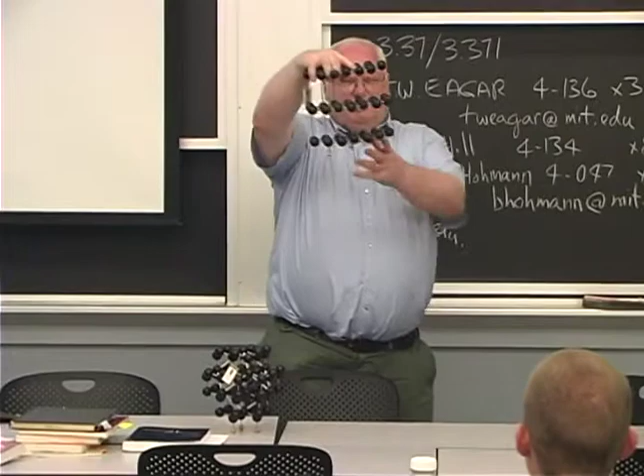This is called graphite, and it has a kind of layered structure. This is called diamond cubic, and it actually has a cubic structure, shown in this little white cell. If you know anything about crystal structures, it's got a face-centered lattice, meaning points at each corner and an atom right in the center of each face, plus a few other atoms hidden inside. This is the crystal structure of graphite, and this is the crystal structure of diamond.

Even though it's the same atom, because of different bonding, graphite has what we call sp2 bonding. The atom in the center has 3 atoms around it, with one up above and below between layers. But the strength of that bond is nowhere as strong as the bonds in the plane, so you have sheets of atoms.

When we get to the welding part, I'll tell you about the history of the early Mercury flights and how they ran into problems when they first put their lubricants up in space. In the first Mercury flights, the graphite lubricants turned to abrasives, and so some of the knobs and switches didn't work very well.

Diamond cubic, on the other hand, has what we call sp3 hybridization, and each atom is surrounded by 4 others in a tetrahedron—like a 3-sided pyramid with a triangular base. That difference in bonding has tremendous effects on the properties: the bonding in graphite is sp2, diamond is sp3, and the crystal structures are different because they reflect the geometry of the bonding.

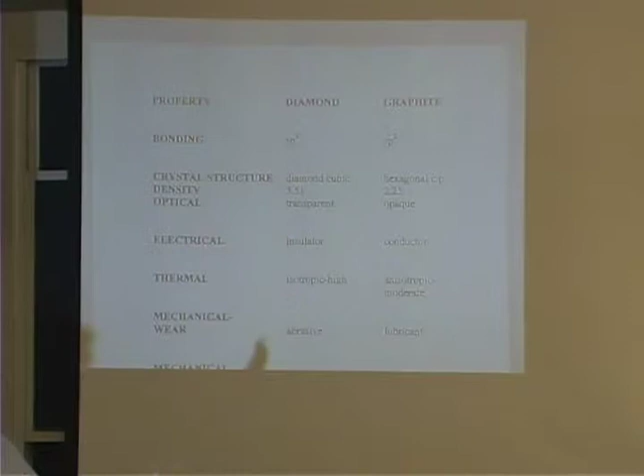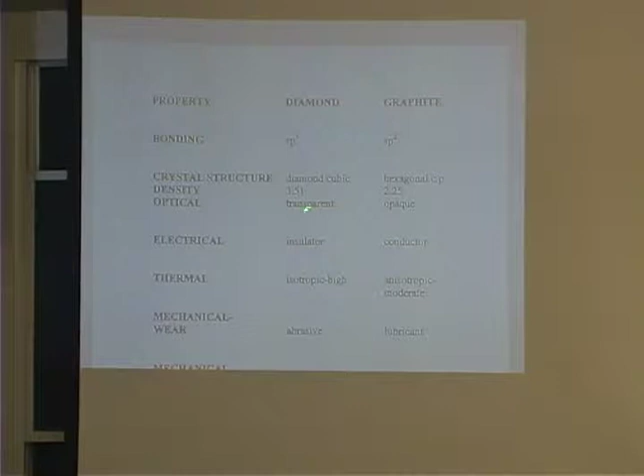The density is different, and whether they're transparent or opaque is different—diamonds are transparent to visible light. Actually, diamond is transparent further into the infrared than any other crystal we have. So if you're using really fancy, very long wavelength infrared, you sometimes have to use diamond windows on your detectors—not because they're hard or expensive, but because they're transparent down to about 50 microns, and there's nothing else that goes below about 40 microns.

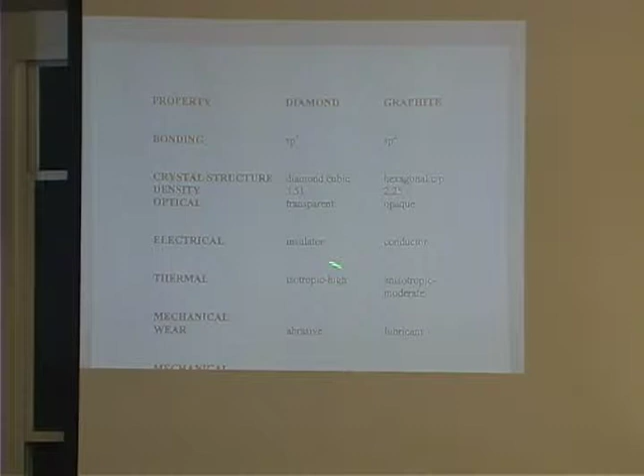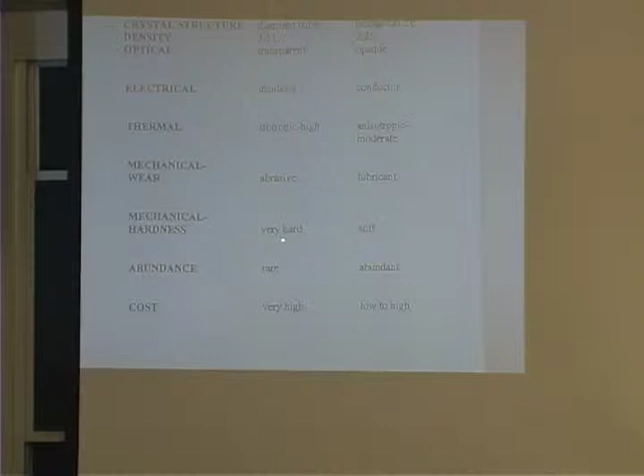Electrically, it's an insulator; over here, it's a conductor. Thermally, it's isotropic with very high thermal conductivity; here it's anisotropic with moderate thermal conductivity. Here it's an abrasive, and here it's a lubricant on Earth, but in space it becomes an abrasive. Mechanical hardness: one is extremely hard, the hardest material we know; this one is relatively soft, we use it as a lubricant. Abundance: rare versus very abundant. Cost: very high, and low to high.

By low to high, this is a piece of anthracite coal, basically graphite. This is a piece of carbon-carbon composite that was being developed to make a filter for chemical plants and other places, because carbon, graphite, has about the best chemical resistance of any material. It doesn't dissolve in any reasonable solvent or acid. It's resistant to all those things.

So what they do is they take polyacrylonitrile, a certain polymer, which is a fiber. You can weave it like a mat, and you roll it up on a mandrel, and stick it in a furnace at about 2,000 degrees centigrade, not Fahrenheit, and burn off all the other stuff, leaving behind a very porous mass, which makes an excellent chemical filter.

So if you're trying to recover catalyst from some chemical processing plant, and you're making Kevlar, which is made in concentrated sulfuric acid, this material will take the concentrated sulfuric acid without eating away the pores, because it's so chemically inert. So that's relatively expensive graphite, because it's got a very specific structure.

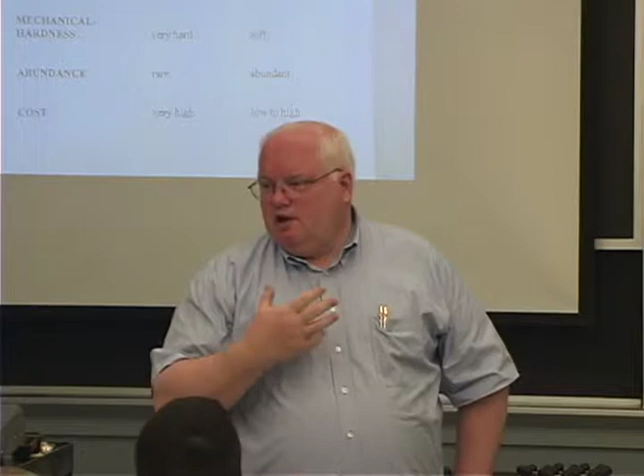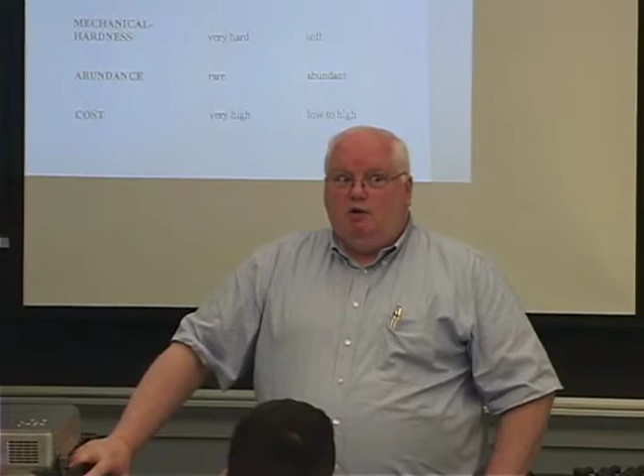The largest application I know of for carbon-carbon composites is in the aircraft industry. Anybody know what it is? Honeywell, used to be Allied Signal in Indiana, makes this—brakes for aircraft are carbon-carbon composites. At the Honeywell facility in South Bend, Indiana, they have vacuum furnaces about twice the size of this room that go to 2,000 degrees centigrade, and they lay up these polymer sheets, form them into brake pads, and cook them at 2,000 degrees centigrade, because carbon is very strong at high temperature and has good thermal conductivity, making a good brake. You need good brakes on a big jumbo jet or other aircraft.

That's an interesting industry too, because it's gone to a situation where United or Delta don't own the brakes on the airplane—they lease the brakes, Honeywell owns the brakes. They also do this now with the whole jet engine. On the United fleet, United doesn't own the engines; Pratt & Whitney owns the engines and leases them to United now.

It's called power by the hour. United wants to pay a certain amount per hour of operation of those engines, and they don't want to worry about whether an engine fails and costs money to repair. They want a fixed cost, sort of like derivative swaps—they basically rent the engine by the hour from Pratt & Whitney.

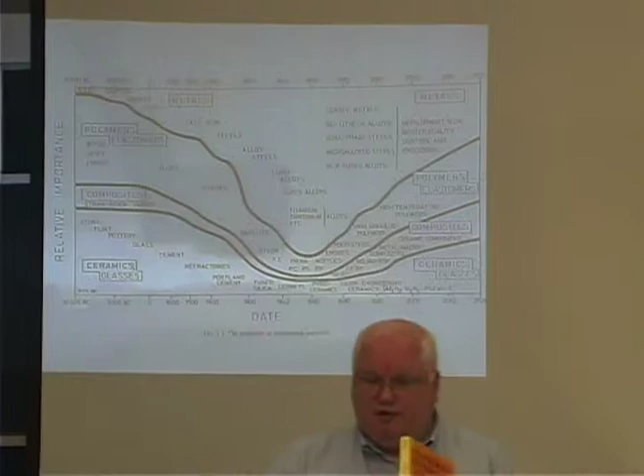Now, this is the history of materials over time, from a book by a guy named Ashby. Mike Ashby just retired a year or so ago as a professor at Cambridge, but he was at Harvard about the time this book came out, around 1980, on engineering materials. He also has a green version, Engineering Materials Two. It's a way to think about selection of materials.

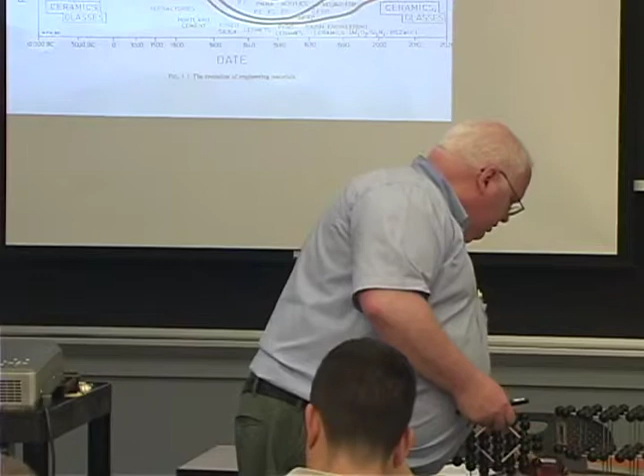He later came out with a handy appendix called Material Selection in Mechanical Design. Mike Ashby is a world-class material scientist and mechanical engineer, and he talks about function and shape. He's talking about structural materials, which is primarily what we'll discuss. This set used to cost about $300 ten years ago, but this one is copyrighted, this one is not. We'll show you what's in the appendix. Ashby came up with what's now called Ashby diagrams for material selection, and you can now buy a $50,000 computer program that helps you select materials.

This is in the beginning of Ashby's $300 book, where he looks at materials through the ages. This is a nonlinear scale: 10,000 BC, 5,000 BC, 0 BC, 1,000, 1,500, 1,800 - not exactly linear in time. It shows relative importance, and back in 10,000 BC, people had gold. Later they had copper. Anybody know why? It'll be part of a little later in today's lecture.

Gold is the only material people would find in its metallic state in 10,000 BC. There was some metallic copper, but only in certain parts of the world, along with wood, skins, fibers, stone, and flint. So he breaks it up into metals, polymers, composites, and ceramics - these are structural materials. Material scientists used to organize this department around metals, plastics, ceramics, and electronic materials. But electronic materials are not a structural material, they're a functional material.

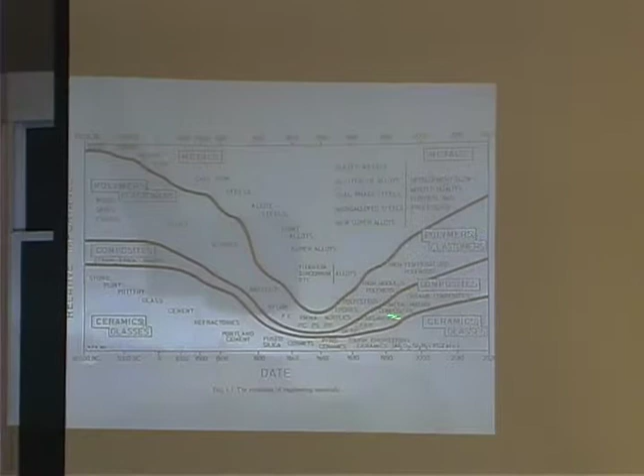So anyway, this is kind of through the ages. Ashby wrote this around 1980, projecting that metals would decrease in intensity and importance, while polymers would become more important, and they did. Composites were going to become much more important from 1980, and so were ceramics and glasses. Now, those predictions have not really proven true.

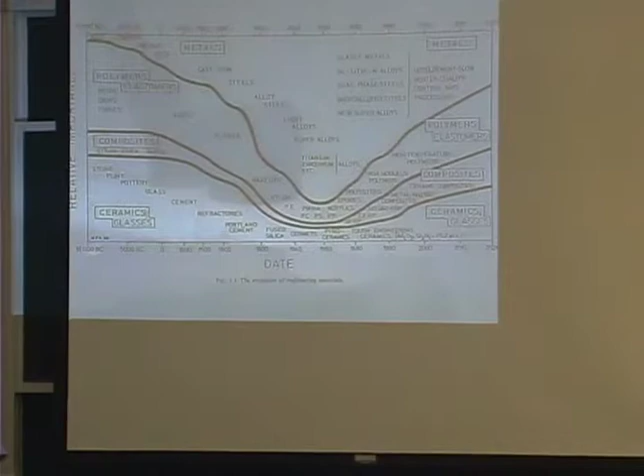Metals are still about as important as they used to be as a structural material. Polymers have increased. Composites have not grown anywhere near the rate people were predicting. I used to say composites were the materials of the future, and always would be. Ceramics and glasses were predicted to increase too, back in 1980 when everybody thought we'd be flying around in ceramic turbine engines.

Does anybody have an idea why? There's a reason for each one of these. Yeah, ceramics have failure proportional to size. It's a brittle material in layman's terms. For brittle materials, the larger they get, the higher the probability you'll have a critical flaw in there - a larger volume means more and larger critical flaws, and it's liable to fail. So if ceramics have excellent high temperature properties, the problem is they break. And in a jet engine, when something breaks, it's not always good.

Okay, composites - what's the problem with composites? Production cost. This is a piece of the X-33 Spaceplane, part of the liquid hydrogen tank. It weighed 4,000 pounds and cost $50 million to build - that's $12,000 a pound for this material. It's basically a commercial Kevlar honeycomb adhesively bonded to a graphite fiber reinforced composite, all cooked in an autoclave and made into shapes.

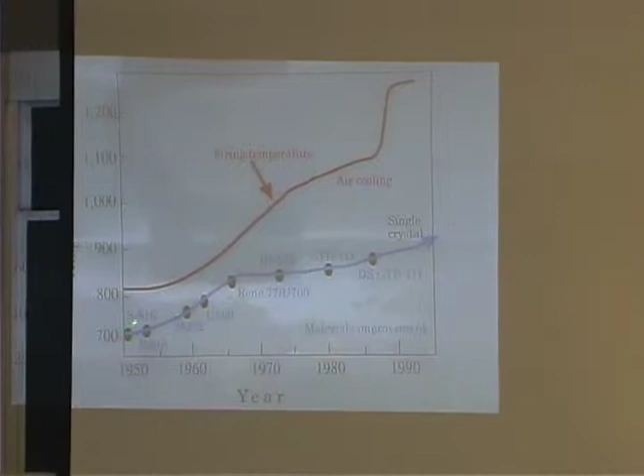Metals - why are metals still the structural material of choice? Well, not all metals are, and we'll talk about that, but a lot of them are. Over the years there have been tremendous advances - for example, this is the firing temperature of jet engines, starting in 1950, remember it was after World War II. The jet engine was really invented during World War II, or a little before, by this guy, Whittle or whatever, in England.

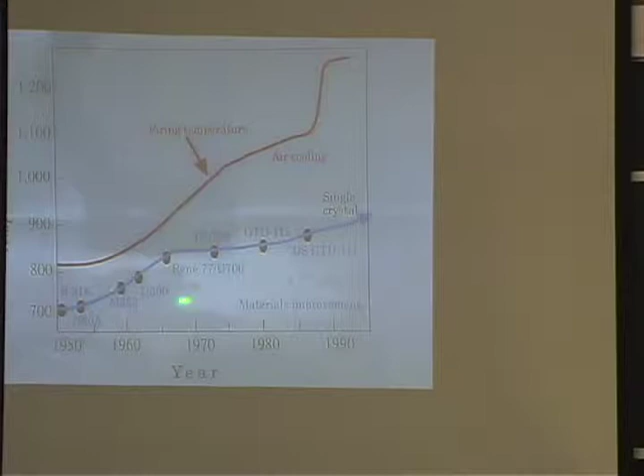But it was really right after World War II, the V-1 bomb that the Germans had at the end of World War II was really a jet engine, but it didn't have a long lifetime. It's sort of like a cruise missile. It only had to make it to the site and then blow up.

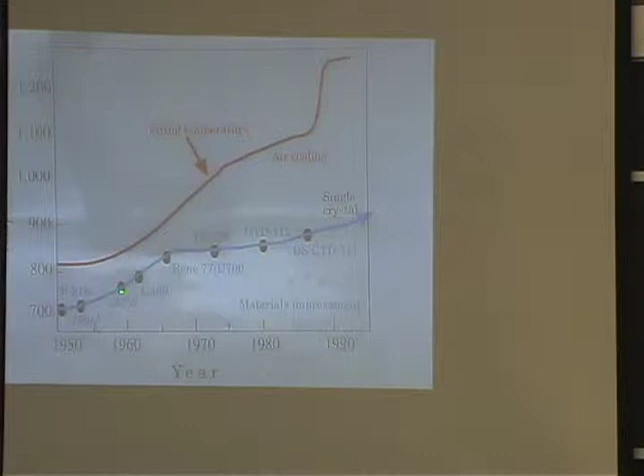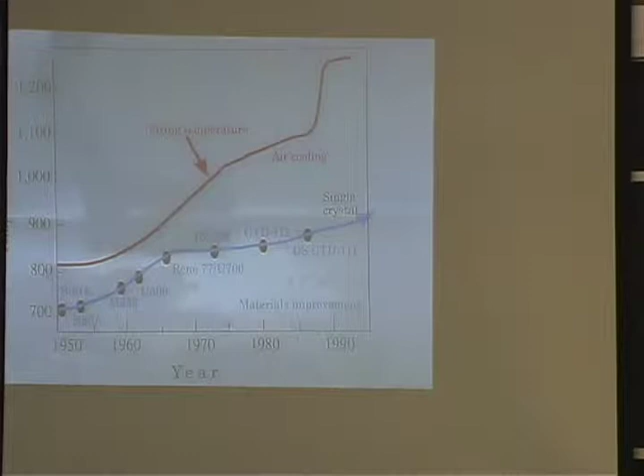So it started out where they used stainless steel or nickel Nimonic 80, Martin Marietta 252, Udimet 500, Rene, which is a General Electric alloy. The temperature went up over time, but they didn't get to very much higher temperatures. These are operating temperatures in degrees C or degrees F. Degree C on this axis, degrees F on that one. And they went to single crystals and stuff, but the firing temperature went up, and the firing temperature in degrees C actually went above the melting point of the metal.

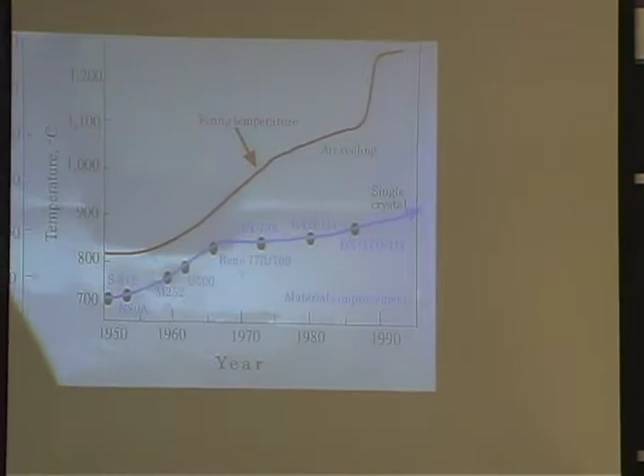So how was that possible? Well, it turns out that sometime around the 1970s, the Air Force programs, because they're sort of pushing the envelope, decided they could take some of the compressed air from the compressor in the engine and blow it through holes in the vane.

So this is actually kind of a 1980s blade technology blade. They're a lot fancier than this today, but it's hard for me to get copies of these things because every one gets serialized, and they have to account for every one because you don't want someone putting counterfeit parts into things -- the blade's no good, failed inspection.

Because this thing, if it's good, sells for $6,000. And there's about 100 of them in a set, so you're talking $500,000 to $600,000 per stage, and you can have anywhere from 2 to 6 or 7 stages in the hot section of the engine.

But basically they cast them, and this is an interesting casting technology, with holes in them, and turbulators, and you blow cooling air -- 1,000-degree Fahrenheit cooling air comes out through here. They laser drill, EDM, or electron beam drill holes at different angles. So the air comes out and creates a cooling boundary layer, a 1,000-degree Fahrenheit boundary layer, because you've got 2,500 or 3,000-degree Fahrenheit combustion gases coming by this.

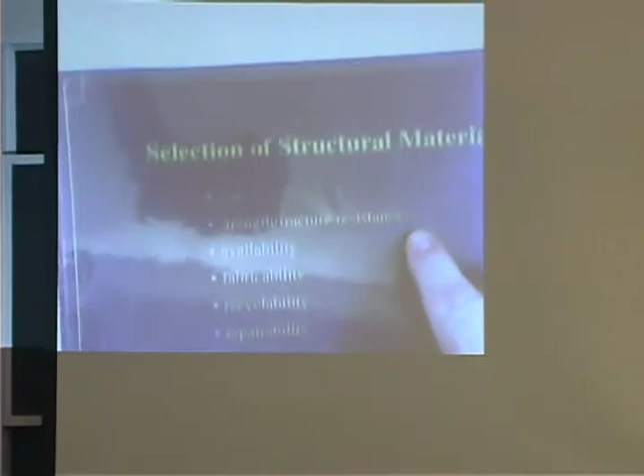There are a number of things, and we're going to talk about what those various things are. But steel just has a special position compared to other things. In fact, if I want to think about selection of structural materials, cost is number one. I don't care what anyone says. Cost is number one in structural materials.

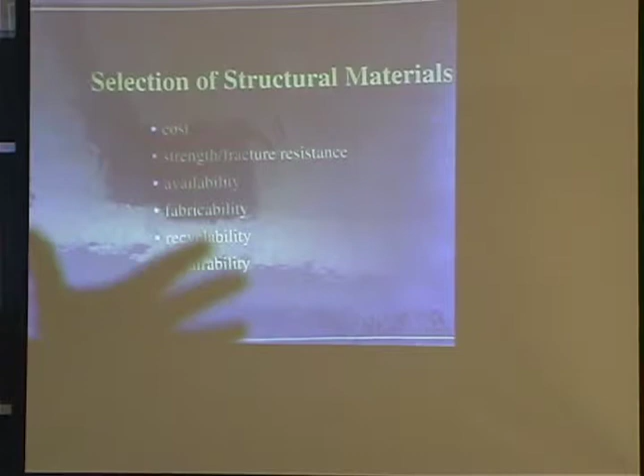Now, if I'm talking about a functional material like a platinum catalyst or a palladium catalyst for the catalytic converter of your car, that's a functional material. It's not structural—you're not building the whole car structurally out of platinum. But structural materials by their very nature are used in large volumes, and that means the cost has to be reasonable. So I'm going to give you some rules of thumb for cost.

Strength and fracture resistance—we're going to learn that metals are much better than ceramics or most plastics. Some plastics are better than steels, okay? But availability, abundance—you've got that. Fabricability, I think you said that. Recyclability and repairability—these are kind of the primary things.

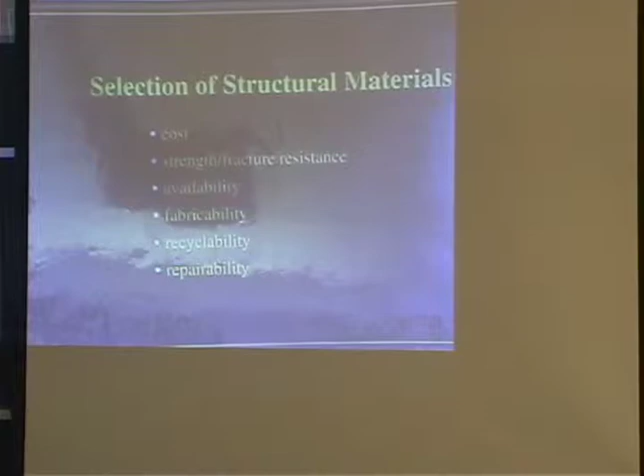Why do we have to worry about recyclability? You know, the aluminum guys are very pleased with the fact that they recycle like 70% of all the aluminum nowadays. And they talk about it—you've seen the ads, haven't you?

Or heard about aluminum as a recyclable material and people turning in their cans. In fact, I have a guy with his grocery cart who comes down my street every Monday morning before 7 o'clock, rooting through everyone's bins every other week when we put out our recyclables, collecting those aluminum cans from my recycling and everyone else on the street.

There's a great story about an immigrant family in Los Angeles that put their son or daughter through MIT by collecting tin cans, soda cans, and beer cans. It's not easy to get $40,000 worth of empty beer cans, but his parents did it for 4 years. Well, that's not exactly true, but that's what the story would have you believe. In fact, I'm sure their son or daughter was probably getting a 95% scholarship from MIT, and they only had to come up with $2,000 or $3,000 a year. But they did it by collecting old beer cans.

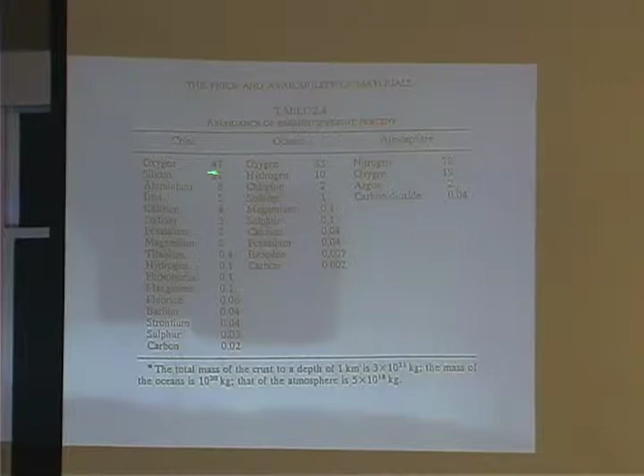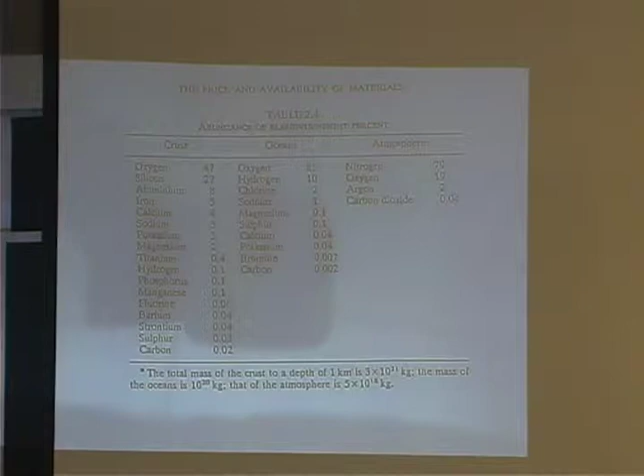In terms of abundance, this is out of Ashby's engineering materials book, in the very first chapter. Oxygen is the most abundant material in the Earth's crust. Most of the metals we have come as oxides or sulfides. Sulfur ought to be in here somewhere, and silicon dioxide, basically dirt. Aluminum is more abundant than iron, but iron is 5% of the crust. That's pretty abundant. It's not too hard to find iron ore.

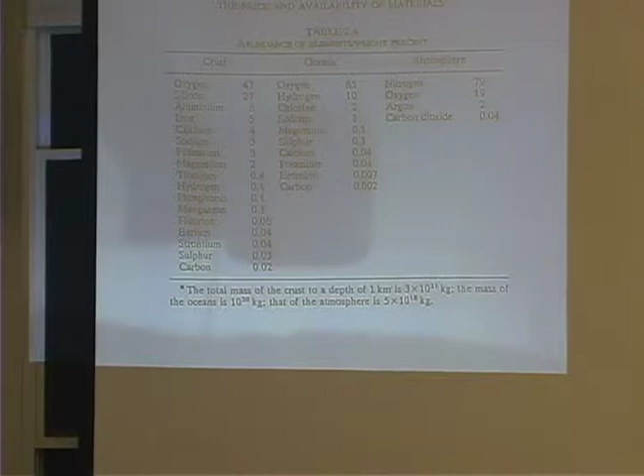By the way, on recycling, people are very proud of the recycling rate of aluminum. Anybody know what the recycling rate of iron has been for probably 80 years? It's about 90%. But there's a very simple reason: steel is something that in the world today we make 800 million tons a year. If you didn't recycle that, you would have some very big landfills full of steel. But steel is valuable enough to recycle.

In fact, some people argue that was one of the reasons the Japanese started World War II, because their whole industry before the war was built on using scrap iron from the United States. I think right before Pearl Harbor, the United States had restricted the exports of scrap iron to Japan, and some people said that was the straw that broke the Japanese back and they started the war. I'm not sure that's true necessarily, but...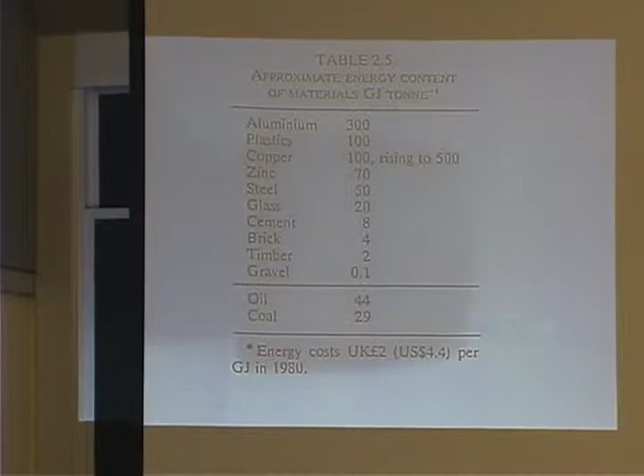However, again out of Ashby, we want to look at the approximate energy content - how much does it cost? It turns out that somewhere between a third and a half the cost of a piece of metal is due to energy content, and it depends on how you account for it. Mining the ore out of the ground takes energy too, mostly just to get rid of the oxygen or sulfur combined with it in the ore, then refining or smelting it into the metallic state. Aluminum takes 300 gigajoules per ton.

Plastics take about 100 gigajoules per ton of energy content, since it's made from oil basically. Copper's problem is there aren't any really good deposits left anywhere in the world. Back years ago in the Congo, they had 6% copper ores - very nice. The largest copper mine in the world, anybody know where it is? Anyone from Utah, from Salt Lake City? Sometimes as you fly into the Salt Lake Airport they'll take you over the Bingham Mine, which is the world's largest open pit mine.

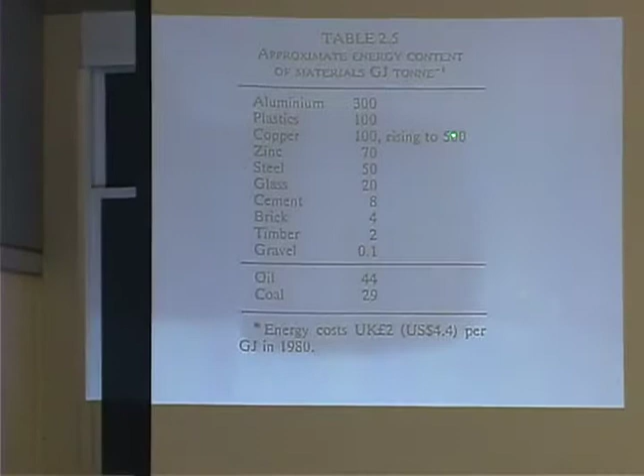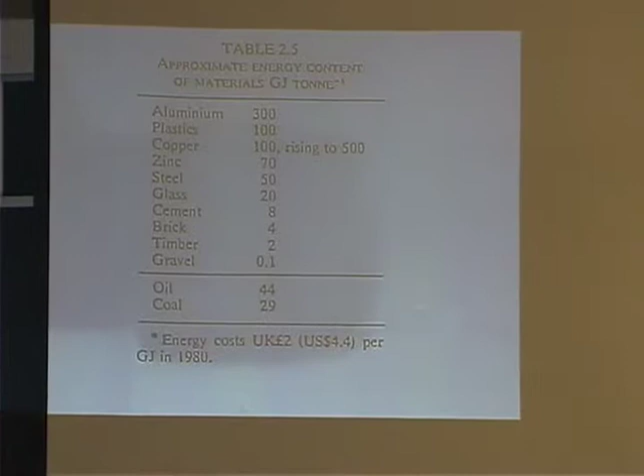Zinc, okay. So this is the energy content, and iron, steel, is down here at 50, about 1/6 the amount of aluminum. People used to predict, oh, aluminum's going to get cheaper. There's about a 4 to 5-fold cost difference between steel and aluminum. People said, well, if you just use more aluminum, the cost will come down. No, it won't. Not when the fundamental cost is the energy content. I'm sorry, that argument doesn't work. They might have taught you that in business school, but if you actually look at the physics, or the chemistry in this case.

Now, if you know what the relative price based on energy is, you also have to think about what the value of a pound saved is in some industry. And the value of a pound saved, this is actually in that article from the materials research, the little appendix, 4-page appendix that I handed out. Although it's expanded a little bit. It's kind of an old slide.

Over the life of the vehicle, the value of a pound saved in an automobile is $2 a pound. That's at $2 a gallon gasoline. Maybe it's $3 a pound now. But basically, if you take a pound out of an automobile, over a 100,000 mile life of the vehicle, you can calculate it out, so many miles per gallon, you're going to save about $2 a pound.

In an aircraft, commercial aircraft, it's about $200 a pound. Now, I remember when LFM first started in 1989, I had some students working at Boeing on composites, because for the 777, they wanted to introduce more composites. Boeing had a figure, an internal proprietary figure, that somehow made it into these students' theses, so it's not really proprietary anymore. $188 a pound was Boeing's number, the value of a pound saved, and that's over about a 100,000 hour life.

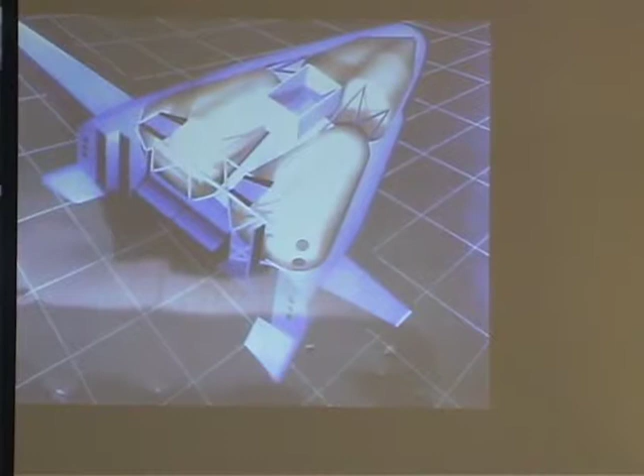So here's the X-33 Spaceplane. It actually has 3 tanks: 2 hydrogen tanks and 1 oxygen tank—I always call it H2O, that's the fuel. It turns out the oxygen tank was made out of aluminum.

These 2 hydrogen tanks, to save weight, were supposed to be made out of composite—there's the composite they ended up going with. There's a lot more story to that; I'll probably talk about it in one of the videotapes you'll watch. But the interesting thing is they couldn't, to get the weight down to make it single stage to orbit—the space shuttle is 2 stages to orbit.

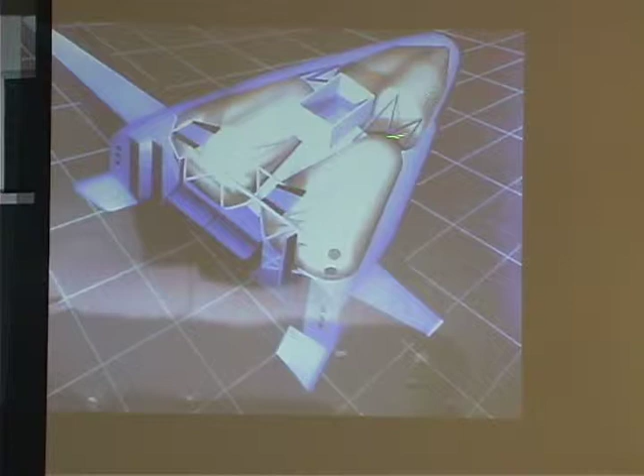It's got these solid rocket boosters and this great big center tank. The solid rocket boosters cover those steel bodies, and the big aluminum tanks are expendable—these fall into the ocean. But they had to get all the structural weight out of that aircraft, so the structure itself is the tanks connected together by ribs, and the skin is just an aerodynamic skin—it's not the structural part. The tanks themselves, stuck together, are the structural part of that aircraft.

It was a $1.3 billion program, part of the rapid prototyping after the first Gulf War. They had 33 months to build it, from issuance of the contract to flying from Vandenberg to Redstone Arsenal, near the Great Salt Flats or whatever. It wasn't even going to go into full orbit—it was just going to have like 10 flights from Vandenberg to Redstone Arsenal, or Rocky Mountain Arsenal, whatever it is.

And it didn't work. And we can talk about that.

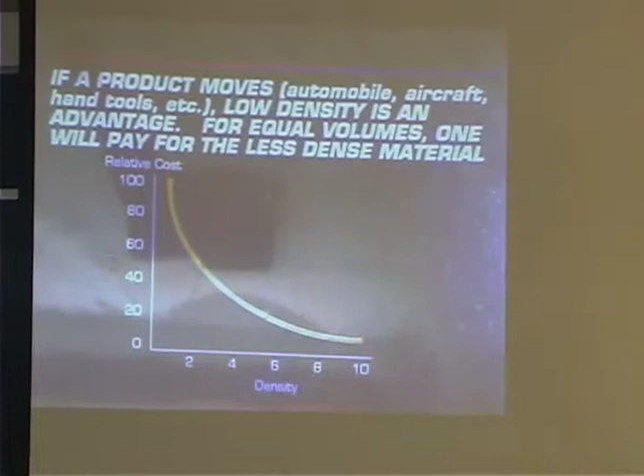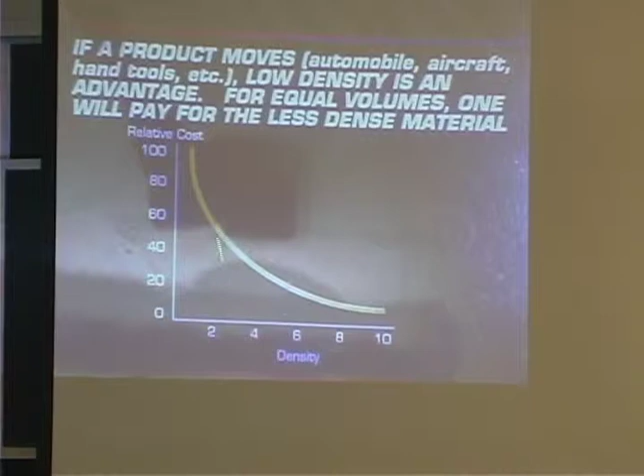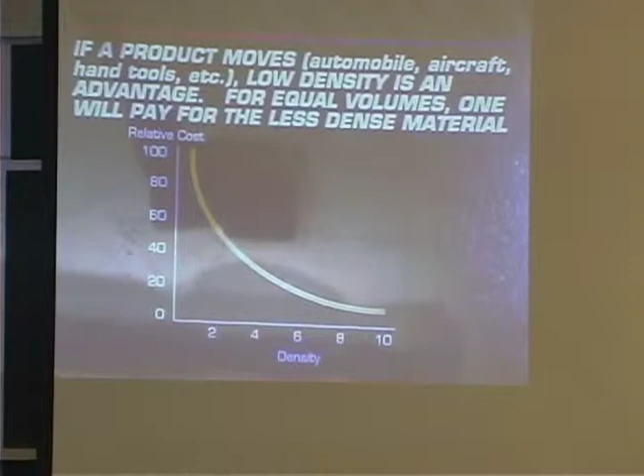Now, when we talk about if a product moves, this is another one of my little things. If a product moves, automobile, aircraft, hand tools, whatever, low density is an advantage. For equal volumes, one will pay for less dense material. The relative cost based on density, if you're talking plastic at 100% relative cost, you get down to steel, it'll typically cost about 15%, 1/6 the amount of plastic. You go look at values of purchasing steel at 40 or 50 cents a pound, purchasing plastic at $3 a pound. This curve is not just an empirical curve, I actually put real numbers in there for different density materials. Going from plastics, aluminum is in here at 2.7, and it's 2.5 to 3 times steel. Okay, that's the shape of the curve for a structural material.

So now what does that mean? Well, just think of an automobile. I will pay more to take weight off the unsprung weight on the wheels because it's spinning faster than the car is moving down the highway, in a sense. It's spinning around. Or I might take it out of the pistons because they're moving faster. If you think of a jet engine, I will pay a lot of money to get weight off the rotating parts of that jet engine rather than the wing weight.

And in fact, when I talk about friction welding in the course, I talk a bit about blisk technology. There's only one high volume blisk used in the world. It's a bladed disc where the blades are actually integrally cast with the disc, rather than being attached through what they call the Christmas tree structure, the root structure. This cross section is a Christmas tree, and that has a lot of weight to it. If you can get rid of that weight, you can take a lot of weight off that disc, which is going, depending on the engine, 20,000 to 40,000 RPM. The M250 engine with its blisk has a little disc about this big, it's all solid casting, and it reduces weight.

Let's move on. Now let's look at the overall use of structural materials. This is in your handout, the Appendix C paper I wrote. It's been redrawn by the National Research Council, but the original drawing is from 1962, an internal General Electric report written by Jack Westbrook, an MIT grad. He did a study for General Electric on pounds per year of material use versus dollars per pound, in 1962 dollars.

Nonetheless, the most commonly used material was the same one we used 10,000 years ago—stone, at 10 to the 12th pounds per year. We use gravel more than anything else, but we tend not to ship it around the world because it's only worth a tenth of a cent a pound in 1962 dollars. Brick is up there too, and cement.

Cement today has seen tremendous growth—we produce 1.6 billion tons a year worldwide. Steel is half of that, about 800 million tons. So cement is 1.6 billion tons, and on a volume basis it's like 4 times the volume of steel.

That's because it's a cheaper material for building bridges and buildings in the third world. The growth rate of cement over the last 10 to 15 years has far outstripped the growth rate of steel because it's going into third world countries that need a cheap building material. It's not necessarily the best material for lightweight applications, but it's cheap.

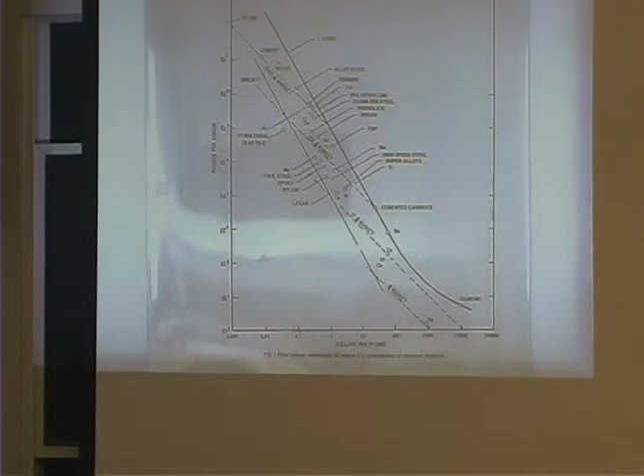The interesting thing here is the slope of use is steeper than the constant size of the volume. What that tells you is that over the long run, not the short run, if I can drop the cost of a structural material by a factor of 2, I should increase its use by a factor of 4 — meaning I should double the size of the industry if I can take half the cost out of the structural material.

Now, it's not that easy, because with the high volume structural materials, I've got a lot of competition. There are people out there making 800 million tons of steel a year. And until recently, until the metals market blew apart, they were losing money in that industry. We'll talk about that probably tomorrow.

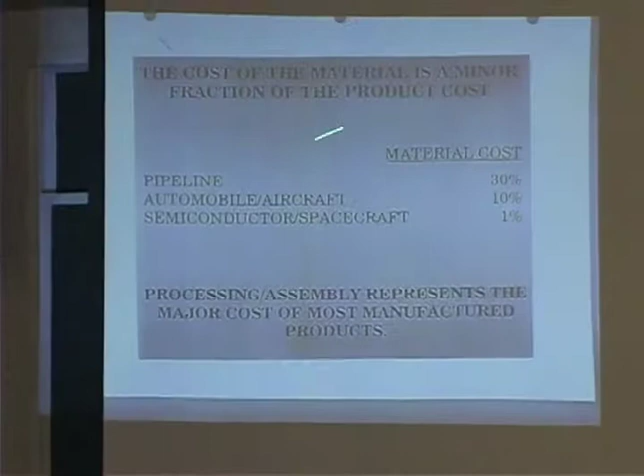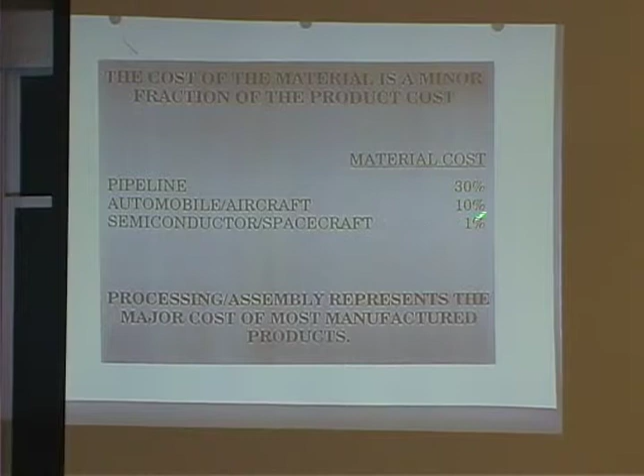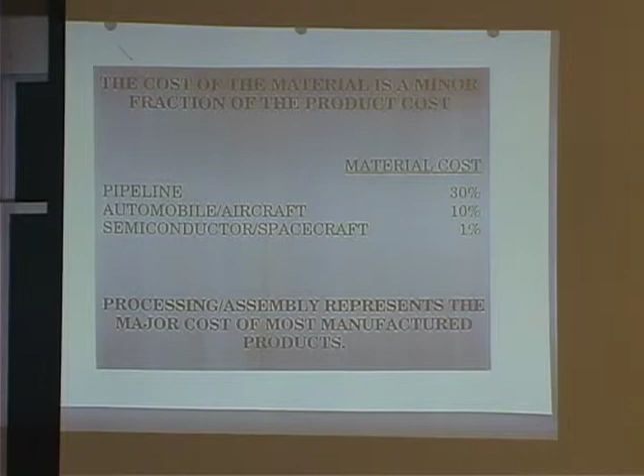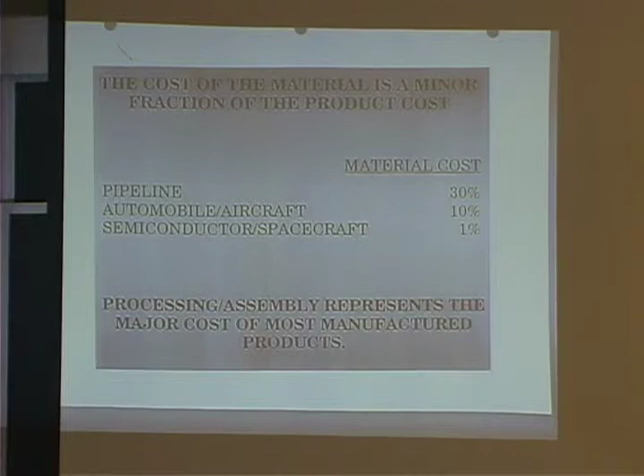But let me finish up with this thought: in producing something, the materials cost is a relatively small part of the overall cost of production. For automobiles and aircraft, the cost of materials is about 10% of the cost of the car or the aircraft. A pipeline, like a gas or oil pipeline, has the highest materials cost of anything I know — about a third of the cost is the pipe, steel pipe. Laying it, inspecting it, and so on is only about two-thirds of the cost.

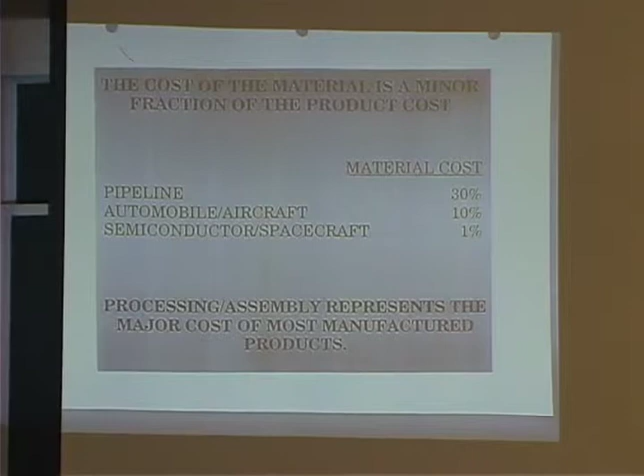Semiconductors, functional materials, or very high value-added materials like spacecraft — the actual cost of buying the material is only 1% of the overall cost. The real cost is making those things.

But when you start thinking about this, remember $2 a pound saved over the life of the vehicle? Well, the materials cost can only be 20 cents a pound in an automobile. The problem was, aluminum cost a lot more than 20 cents a pound. Steel, back 15 years ago, was costing about 20 cents a pound, so you could make automobiles out of steel. But you couldn't afford to make them out of aluminum unless it was a $40,000 Audi. That's what I used to say in 1995: any fool can make a $40,000 sedan out of aluminum, but who can make a $15,000 sedan out of aluminum? Nobody, okay?

Turns out the basic steel structure of the car is worth about $500 worth of steel, but in aluminum it's like $2,500. So an extra $2,000 on the cost of a $15,000 car, that's a hit. But on a $40,000 Audi, no big deal — someone paying $40,000 for an Audi isn't price sensitive. If it costs $42,000 or $38,000, it comes out in the wash. You can sell them the pizzazz for more than $2,000, right?